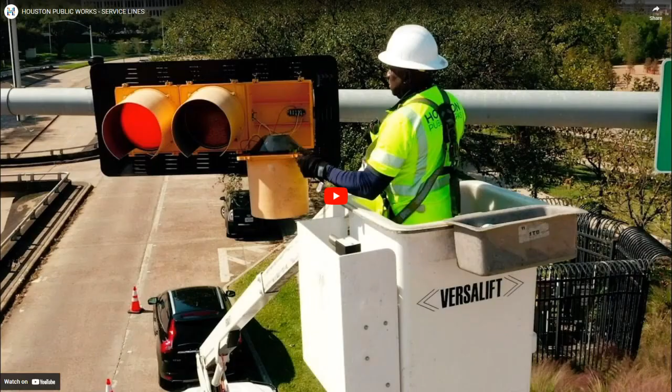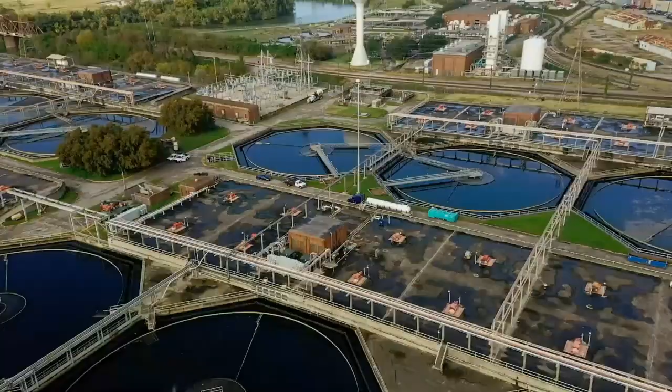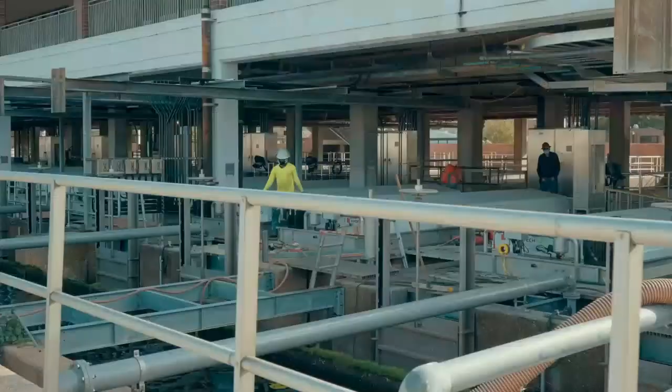Houston Public Works is responsible for the daily tasks you may take for granted. You may not notice us, but we work around the clock to support you. We are the foundation for life in Houston.

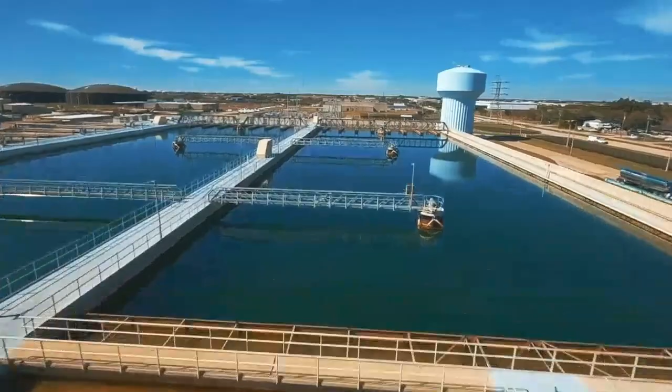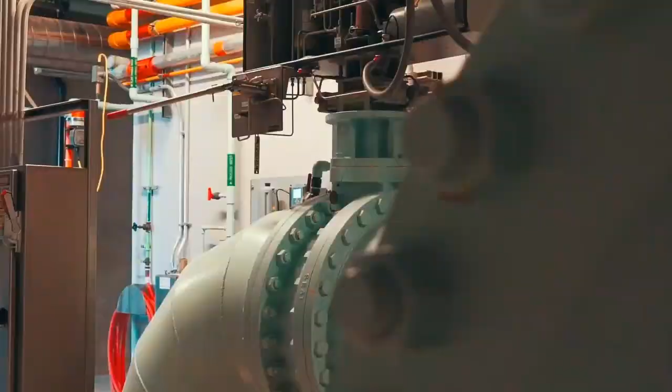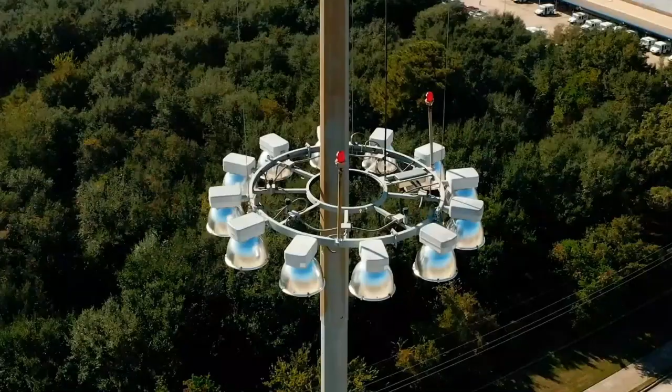Houston Water distributes enough fresh water to fill the Astrodome 4 times a day. Transportation and drainage operations handle 16,000 miles of streets, over 1 million signs and street names, and thousands of drains.

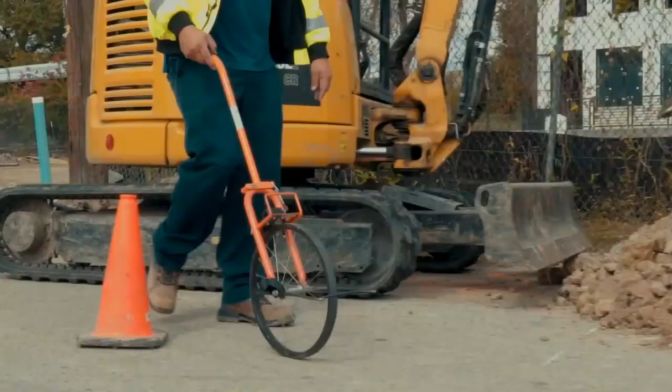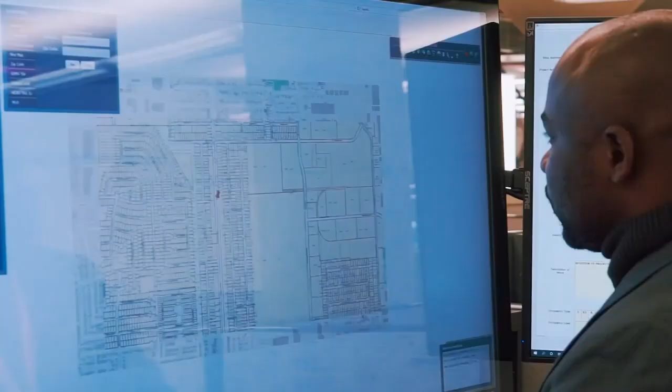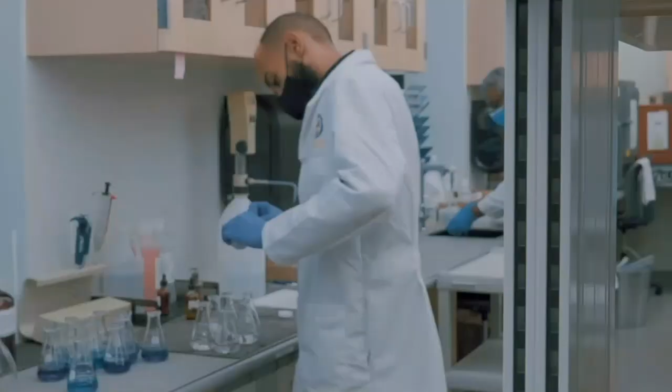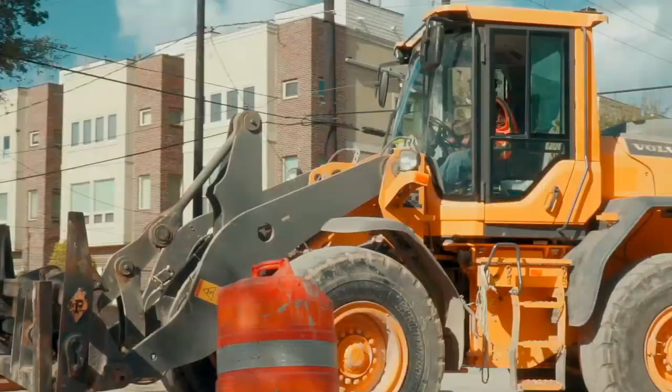The Houston Permitting Center regulates hundreds of projects so you can work, play, and live safely. Customer Account Services ensures 2.1 million people have access to safe drinking water with efficiency, accuracy, and flexibility. Capital Projects manages the critical improvements that make Houston better every single day.

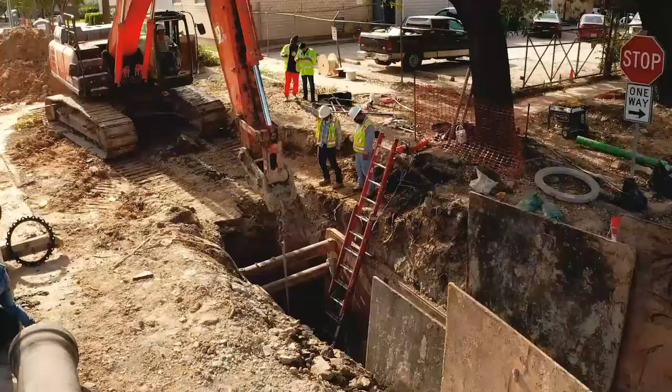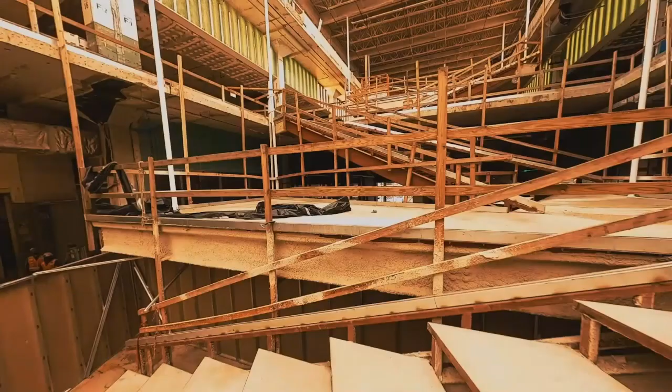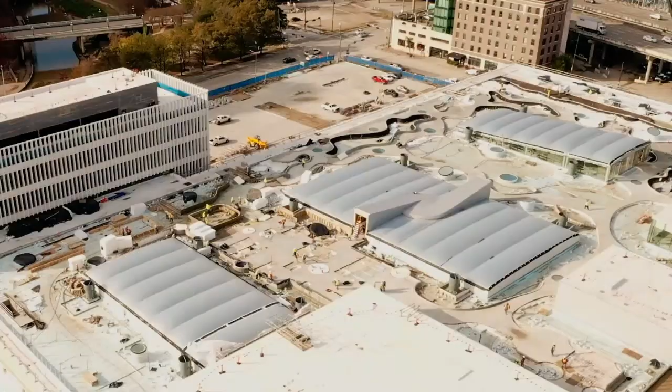Houston is always moving towards growth, innovation, and progress. We are the largest, most diverse public works organization in the country. We are one team with one purpose. Together, we create a strong foundation for Houston to thrive.

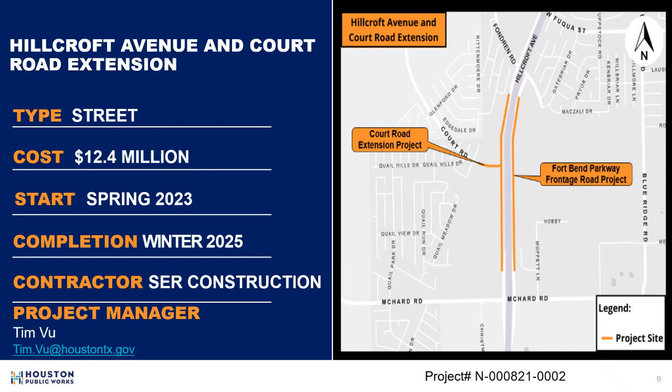Work is scheduled to begin this month in spring of 2023 and anticipated to be completed in winter of 2025. The project schedule will depend on weather conditions. The contractor will work Monday through Saturday from 7 a.m. to 7 p.m. However, extenuating circumstances may require limited work to take place on Sundays. The contractor is SER Construction, and the project manager is Tim Vu.

This project will construct a major thoroughfare to include concrete pavement, curbs, sidewalks, 2 bridges, street lighting, storm drainage, and a detention pond. According to the project numbers, this is a VIP, a very important project.

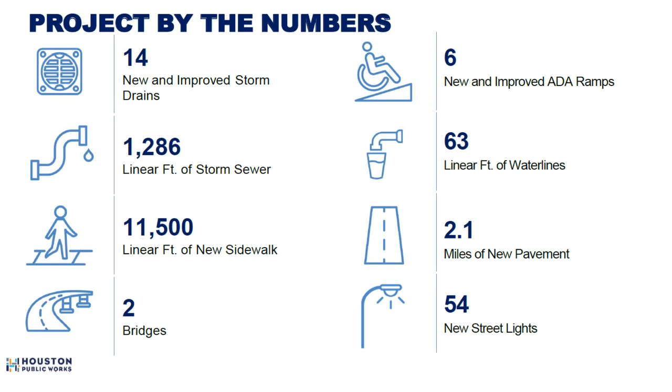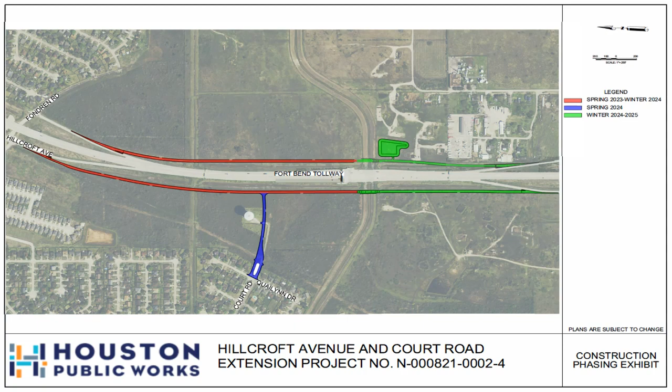There are 3 phases to this project. Phase 1 in red will commence this month, spring of 2023, to winter of 2024. Phase 2 in blue starts in spring of 2024, and Phase 3 in green will begin in winter of 2024 and end in winter of 2025. These phases are subject to change. To receive the very latest updates, make sure to subscribe to the project page found on engagehouston.org.

So what do the seasons mean? Our construction timeline is as follows. Winter constitutes January, February, March. Spring is April, May, June. Summer is July, August, September. And fall is October, November, and December.

Now, I've got good news and more good news. The potential impacts for this project are very, very low, and they are only temporary. So yes, utilities will not be affected. The project is limited to minor relocation of water lines that will not impact your neighborhood.

Traffic: this project may have limited materials delivery trucks in the area. Most work will be in the unpaved area adjacent to the Fort Bend County Parkway toll road. There will be removal and replacement of pavement and sidewalks on Court Road from Quailynn Drive to the west dead end within the right-of-way. No work is planned on individual private properties. The traffic control plan can be found on the project page at engagehouston.org.

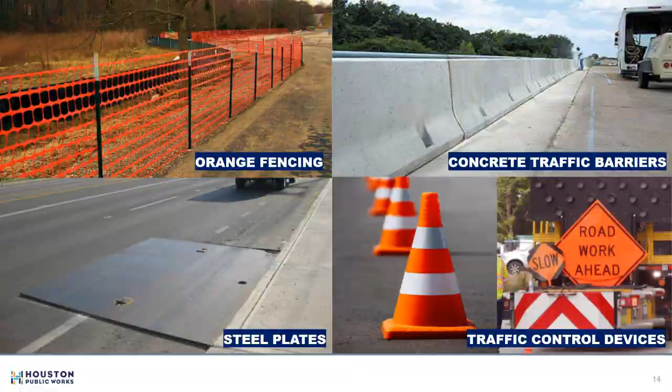We encourage you to go to engagehouston.org to view more project details. The project page includes additional exhibits, the traffic control plan, and tree protection plan right at your fingertips. And now a brief demo on how to navigate your way on engagehouston.org.

Welcome to engagehouston.org. We're incredibly excited to share this platform with you. This site allows us to communicate with Houstonians about the changes that are happening in their neighborhood. Our goal is to make the site visually fun and engaging, as well as easy to navigate so that everyone can find what they need.

For all public meetings, we send out notifications to the community, and one way to access the meeting link is to click on the Join Us button. Another great thing about this website is that we have enabled social media shares. Users can share meeting links, project pages, and updates to their social media feed through private messages and/or email. This helps us in getting more information out to the community.